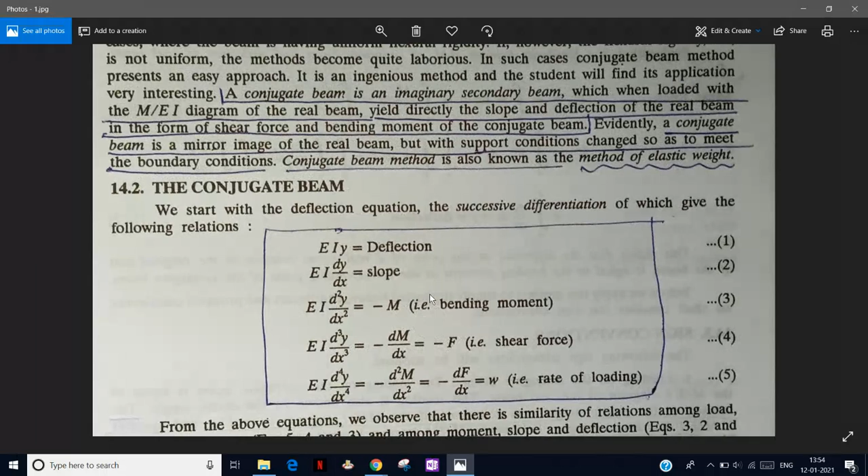So first, what is a conjugate beam? A conjugate beam is an imaginary beam with a similar kind of loading condition.

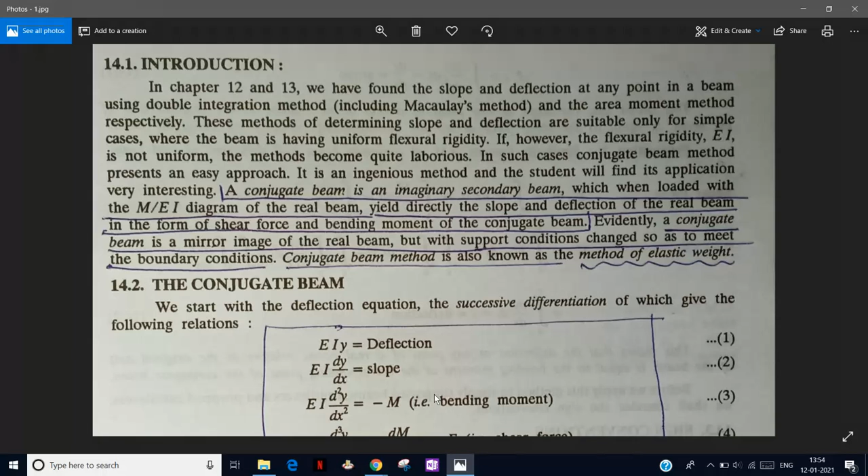There are many deflection finding methods. You can find the deflection by the area moment method, Castigliano's theorem, strain energy method, double integration method, and so on. But whatever method you use, the result should not change.

For example, a simply supported beam with a point load at the center: deflection is WL cube. If the point load is W, then it is WL cube upon 48EI. So whichever method you use, the result should not change.

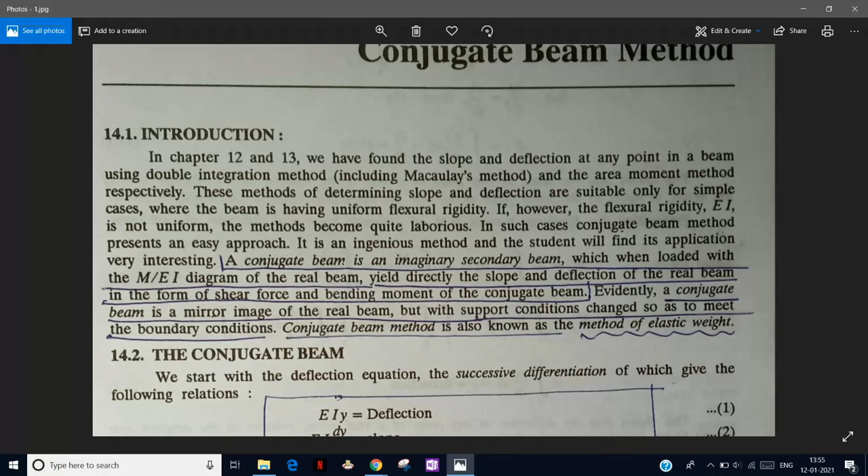So this is the method, which is the conjugate beam method. What is a conjugate beam? It is an imaginary beam, or you can say a secondary beam.

What we do is, for our actual beam, we draw the bending moment diagram, and then we divide it by EI, the flexural rigidity. Then that M by EI diagram, whatever graph you get—whether triangular, rectangular, or parabolic—that curve will become your load.

For example, a uniformly varying load has a triangular shape, so it will remain the same. If your M by EI diagram is a rectangle, then your loading for the conjugate beam is that rectangular uniformly distributed load. If it's triangular, then it is a uniformly varying load.

So what we have to do in this method is: first we draw the shear force and bending moment diagram for the real beam, the beam given in the question. Then, after the bending moment diagram, we divide it by EI.

We divide by EI, and whatever diagram we get, we put another beam over there, and that beam will be our conjugate beam. You can say it is a mirror image of the real beam, and it is also known as the method of elastic weight.

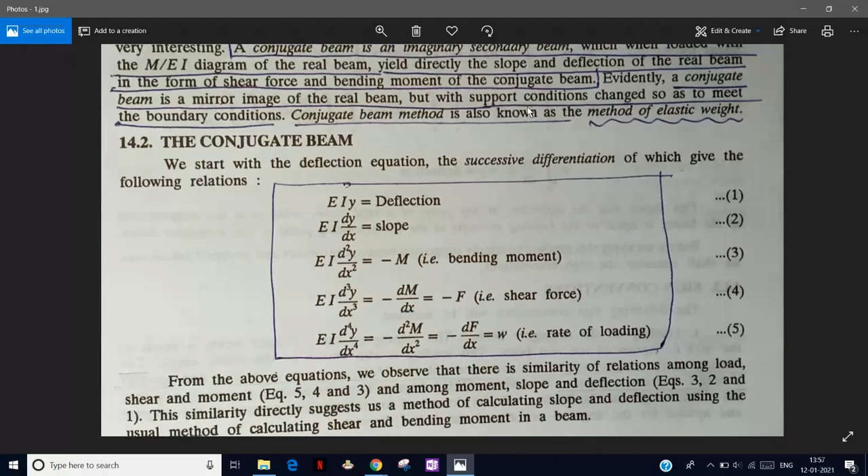So where did this equation come from? Before going to any derivation, we know that EI into Y is called deflection. If you take the derivative dy by dx, it becomes the slope.

If you take the second derivative, it becomes the negative of bending moment, as we all know. Again, if you differentiate, it becomes the derivative of bending moment. In equation 4, you can see it becomes shear force, and if you differentiate a fourth time, the deflection y becomes del F by del x.

That means the rate of change of shear force at any particular point gives the rate of loading w. We all know these relations, so we will use this relation in our method.

Now one thing, write down somewhere: whatever shear force diagram you get for the conjugate beam will give you the slope, and the bending moment diagram of that conjugate beam will give the deflection for the real beam.

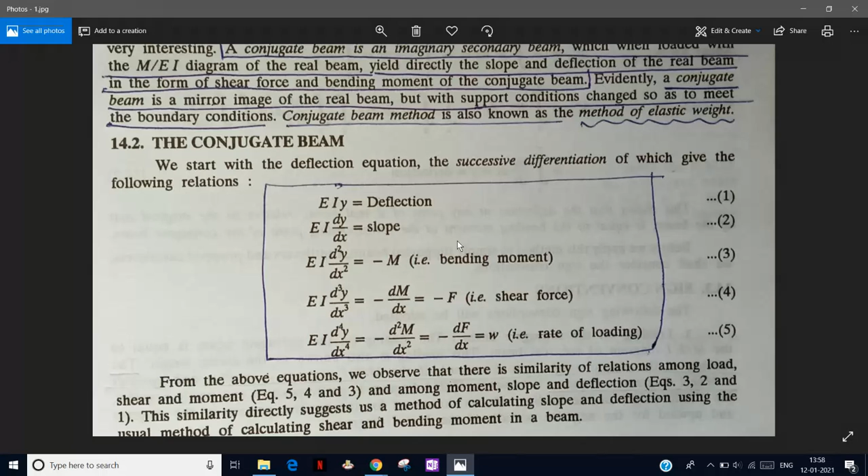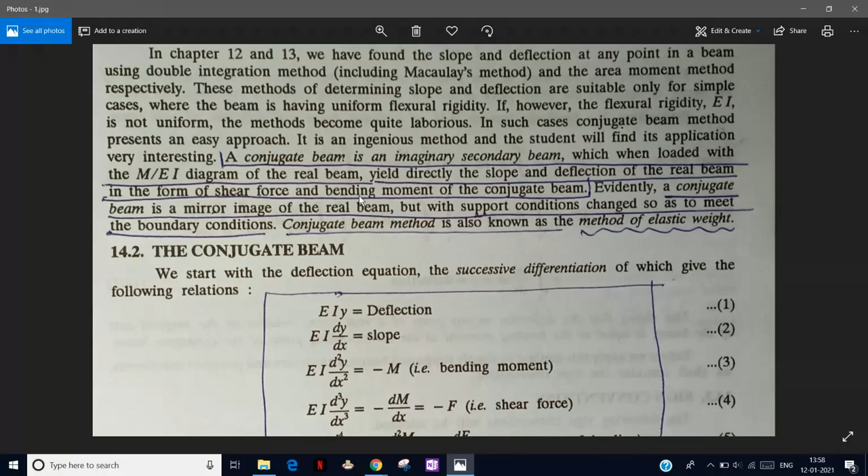This is all written here, and it's not something I wrote myself, but it's in the book, and I have underlined that point also here. So this is the basic concept about conjugate beam—what a conjugate beam is.

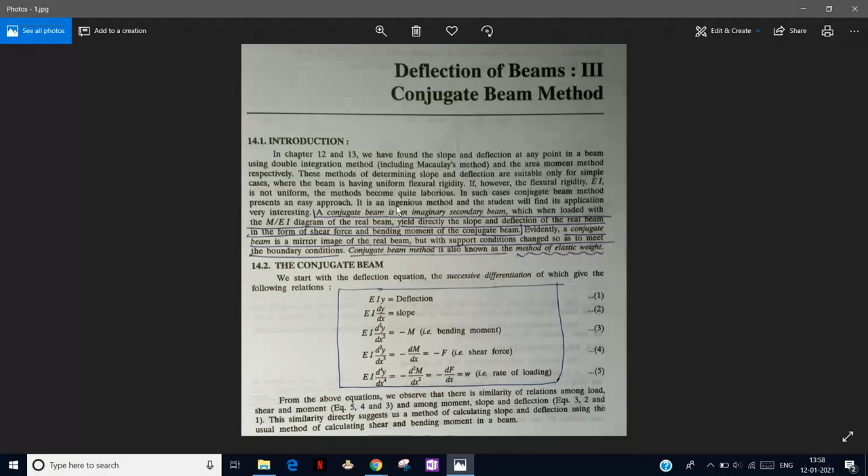The imaginary mirror beam where the load is M by EI, whatever our actual bending moment divided by EI, that will be our loading condition.

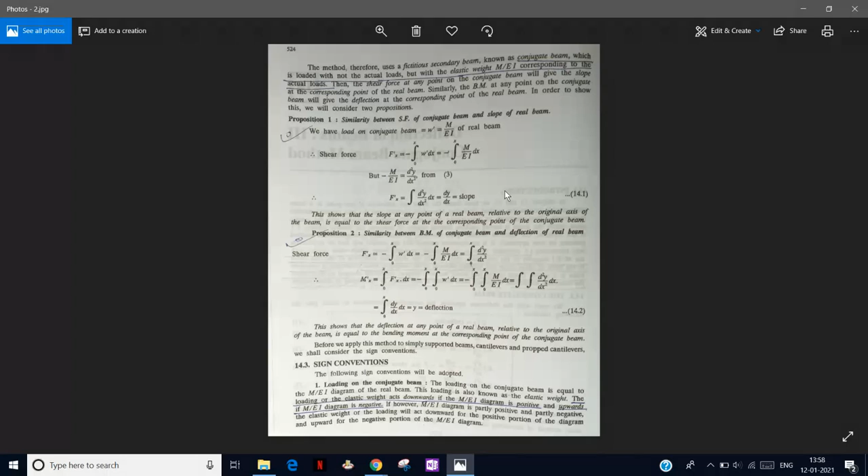So the last statement I will tell is that the shear force diagram for conjugate beam is slope, and the bending moment diagram for conjugate beam is deflection. This is a mathematical proof of it.

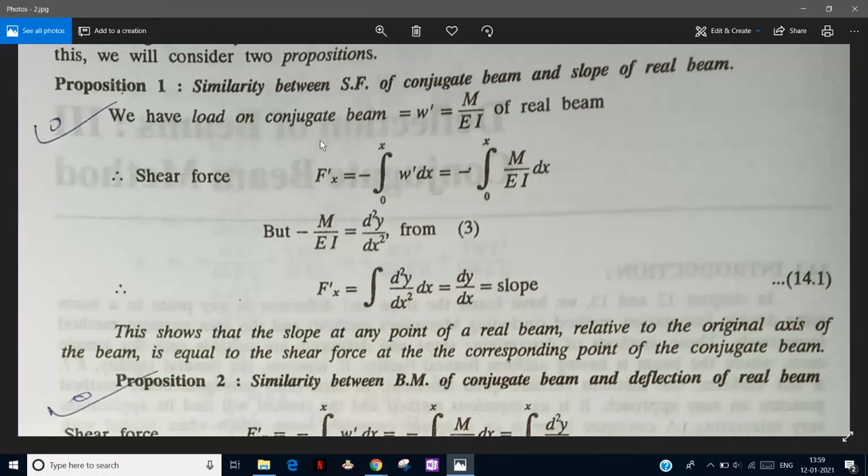Because if I go on to derive it, it will be a very long video, and this is a very easy derivation. So whatever I said, that is a mathematical proof.

Now second thing, the direct sign convention, direction, or you can say sign convention. So for loading, if M by EI diagram is below the line, like for example cantilever beam, your bending moment diagram is below your zero line, or beam line. So you have to take

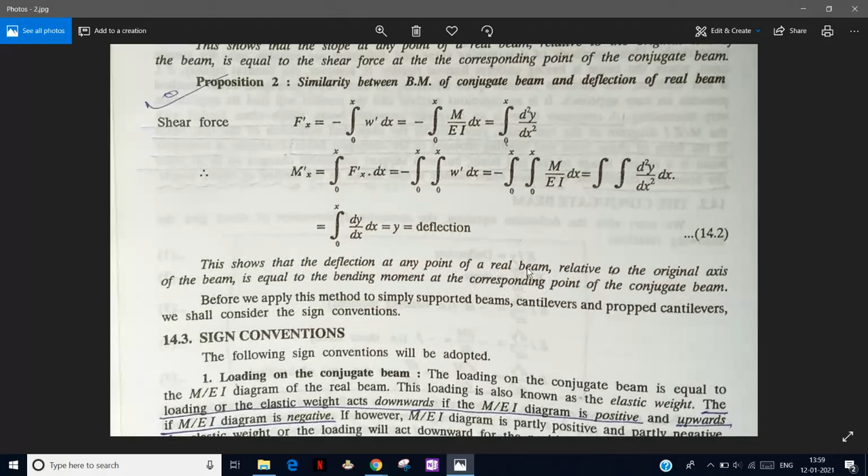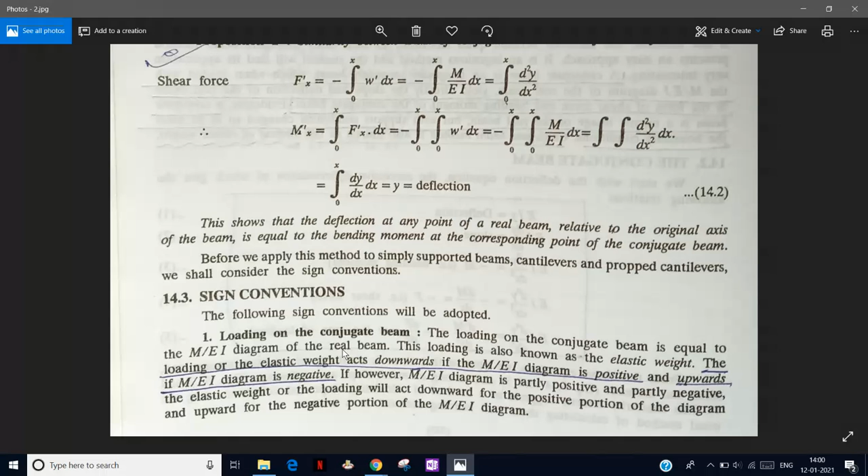And loading condition will be upward, that means down to up, upwards, when M by EI diagram is below the beam line. In case of cantilever beam, we know the triangular or parabolic shape is below the zero line, so in that case loading will be upward.

Next sign convention, that is slope and deflection, I already told you.

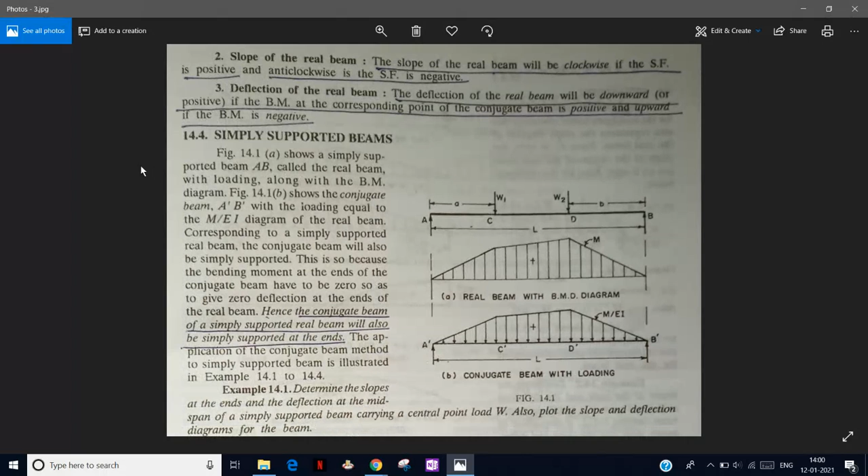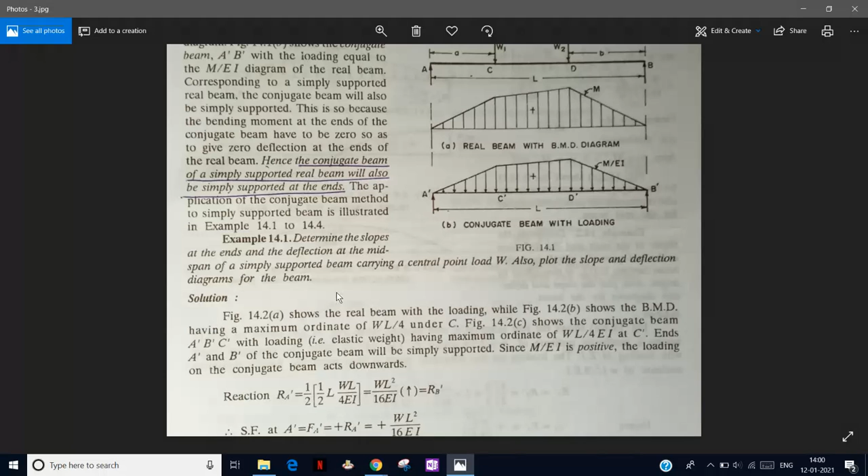Now let us take one example. This is the first example, 14.1 as per the book: determine the slopes at the ends and deflection at the midspan of the simply supported beam carrying a central point load W, and also plot the slope and deflection diagram of the beam. That means our simply supported beam with point load W.

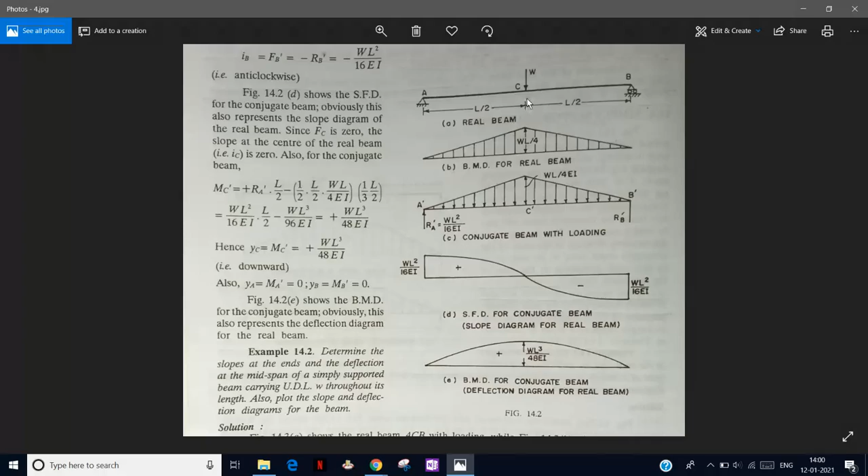So let me go on to the next page. This is the beam, simply supported beam with point load.

We know the maximum deflection occurs at the center, and maximum bending moment is also at the center, with magnitude WL by 4. Now divide by EI, so the M by EI diagram will be WL by 4EI, and the shape is similar.

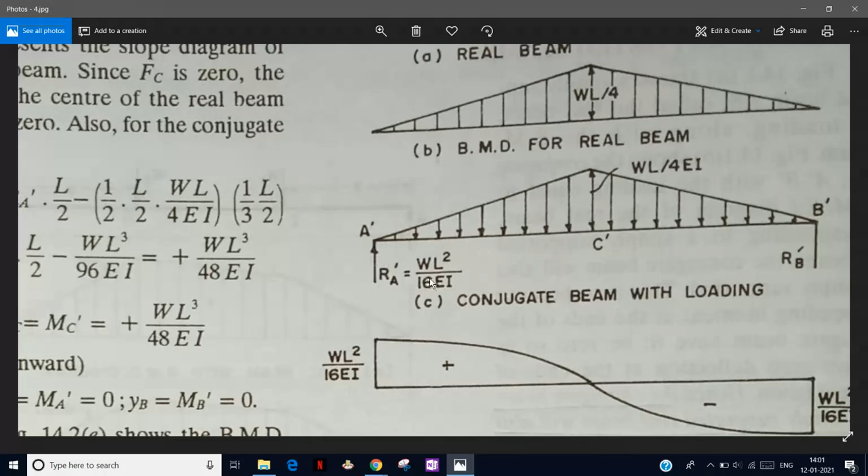Now this will become a loading condition. So here, as you can see, the conjugate beam with loading, figure C. These are the reaction forces and this is the downward force. So all the calculations are done here.

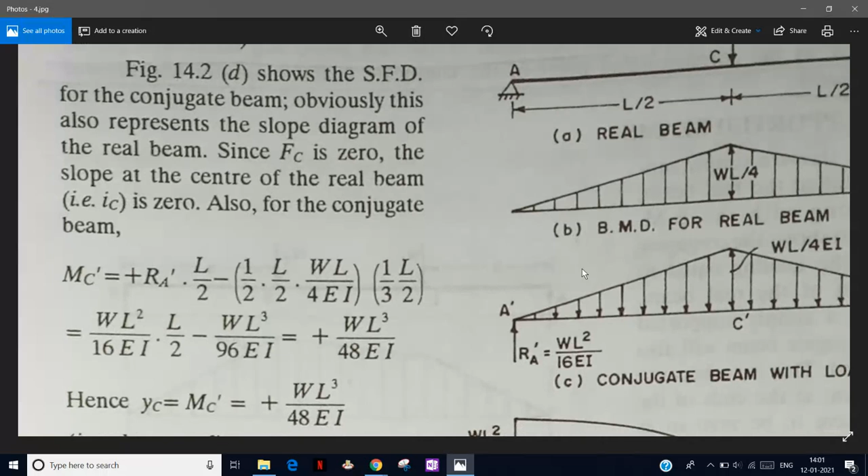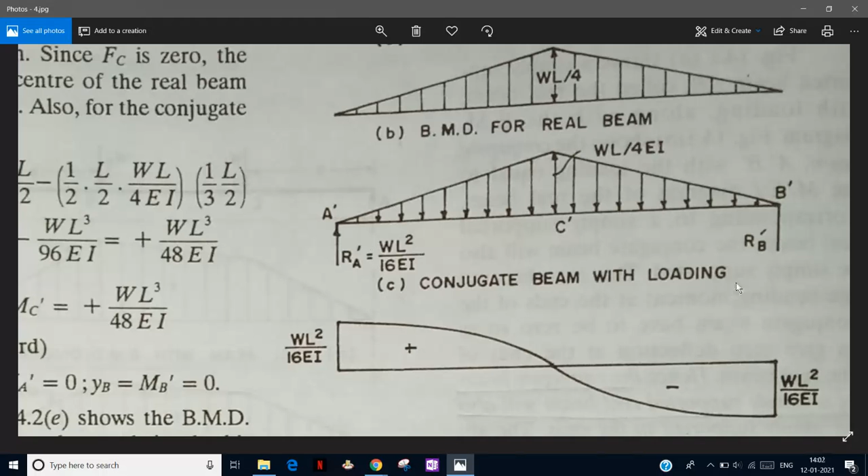WL square upon 16EI, WL square upon 16EI. You know very well the equilibrium condition: taking moment about one of the points equals zero. So you will find RA dash and RB dash, that means reaction, WL square upon 16EI.

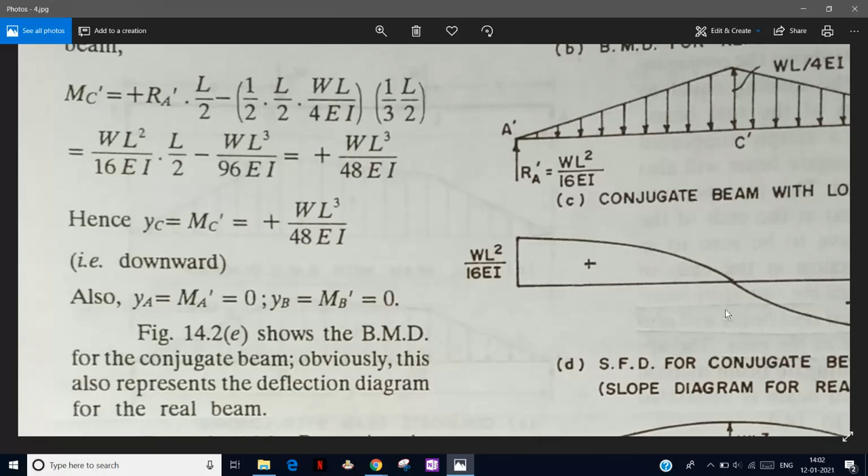Then bending moment diagram—sorry, first let us draw the shear force diagram. So here there is a point load, so there is a sudden rise and then a gradual decrease because the area is increasing. So here shear force is 0, 0, and it goes like this, positive and negative.

So here the maximum value is WL square upon 16EI, that is the maximum shear force value for the conjugate beam. That maximum shear force value means maximum slope, and the maximum slope in case of simply supported beam is at the ends, at points A and B.

And what does maximum shear force of conjugate beam show? It shows slope of the real beam. So this is the slope, WL square upon 16EI.

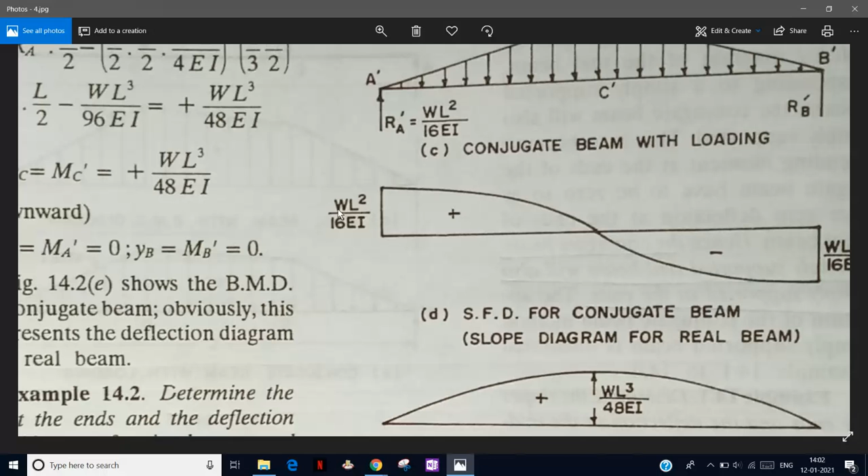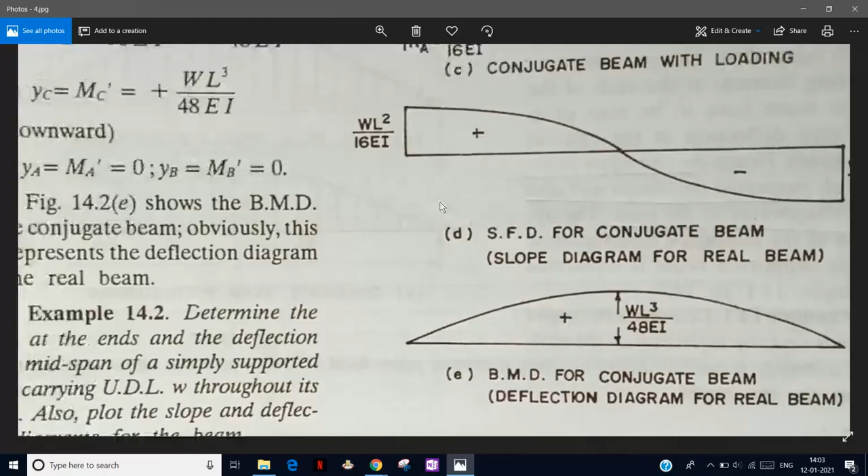Now if you draw this bending moment diagram, it is a cubic curve, WL cube upon 48EI, because first this is the calculation—they have taken the moment about point C.

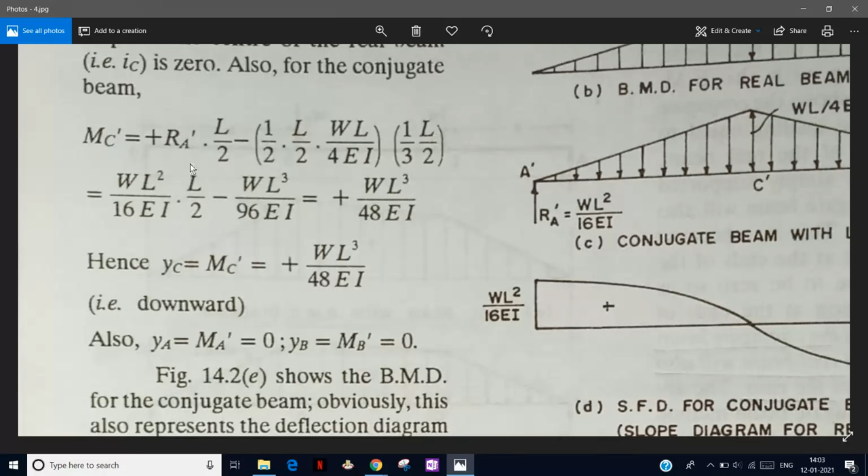So there is RA force into L by 2 distance, positive slope, and this is the triangular area, uniformly varying load. So its weight will act as a CG, that is from 2/3 from point A. After the calculation you will get WL cube upon 48EI, that is the maximum bending moment value.

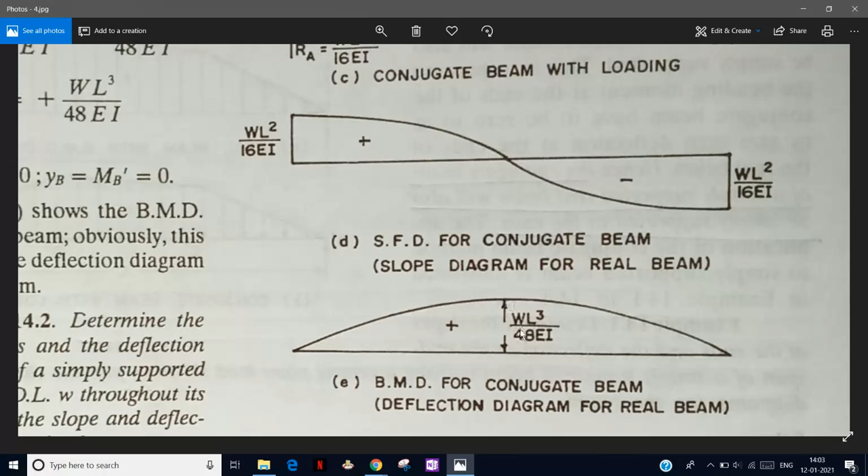The curve follows a cubic curve, and the maximum bending moment value will give the maximum deflection, and in a simply supported beam, maximum deflection occurs at the center. This deflection value will give you the deflection as WL cube upon 48 EI. So this is the method.

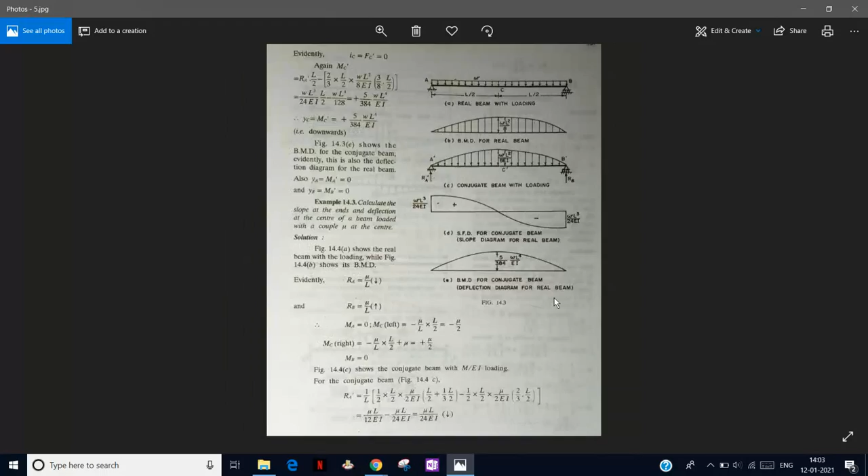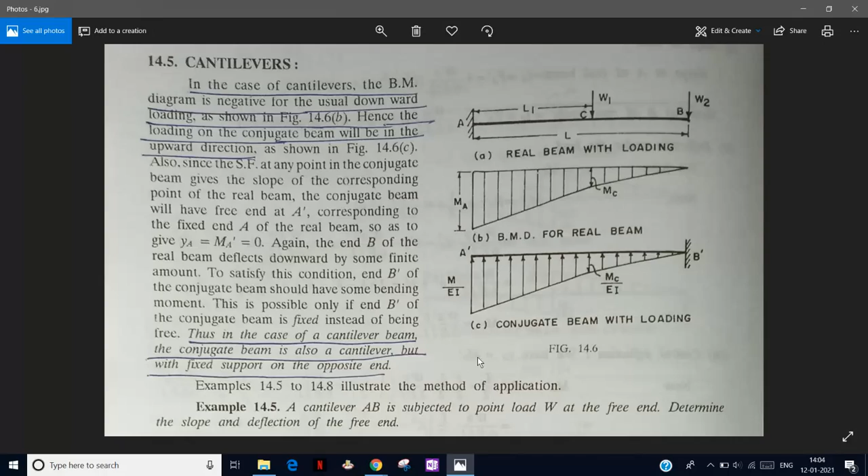Next we will take an example of cantilevers, but there is one change in cantilever. The change is that whatever fixed end will become free end and free end will become fixed end. As you can see here in figure C, the bending moment diagram is downward, so loading will be upward side, as shown in the figure. We will solve using the same method.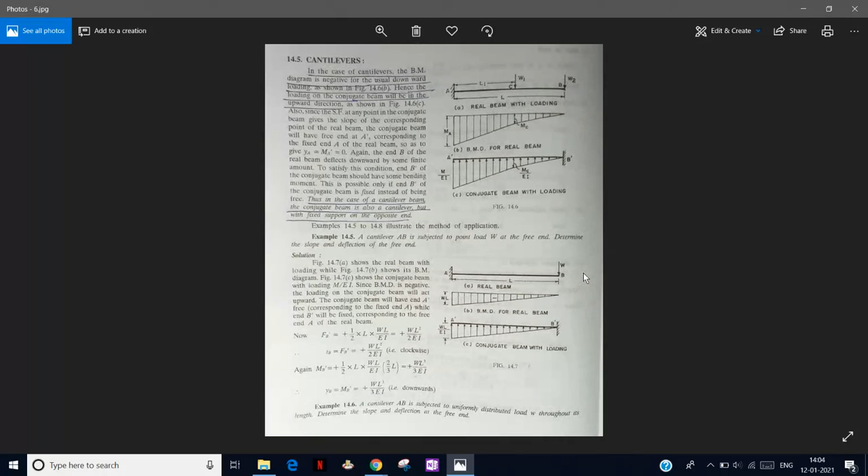So this is the thing. Now in a simply supported beam, we do not have to change anything, but in cantilever and internal roller support, we have to change some conditions. So what are those conditions, please keep in mind.

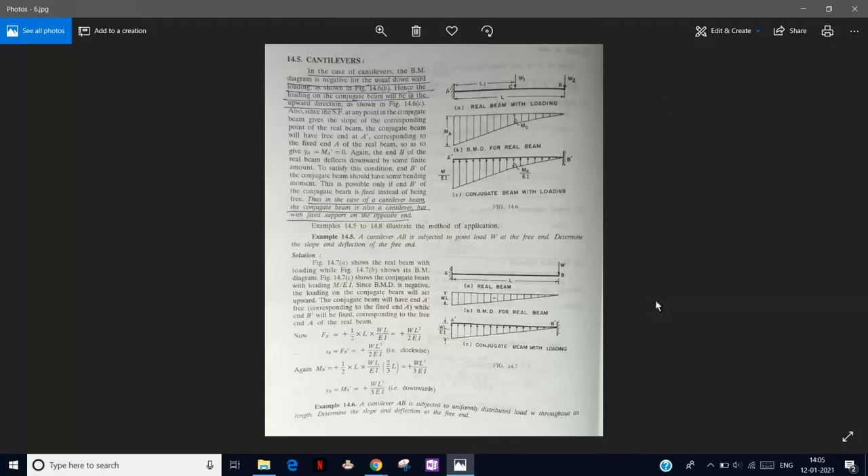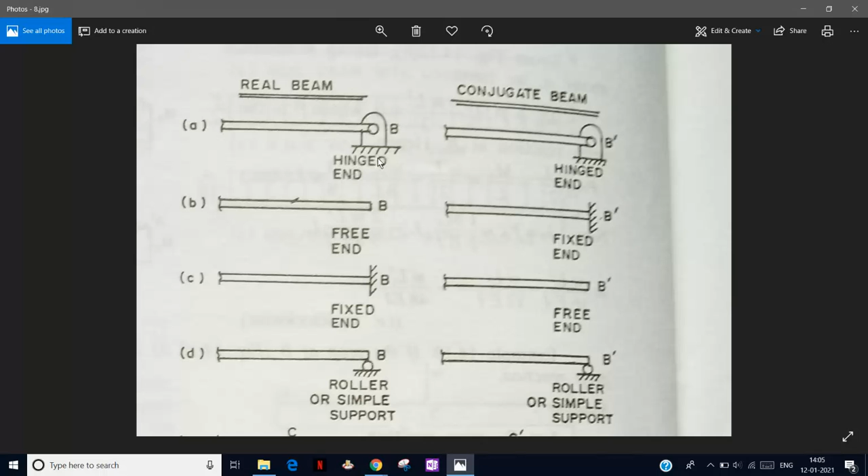This is some sign convention. If this is the real beam and conjugate beam, and there is a hinge end, that means simply supported case, so in the conjugate beam there is also a hinged end, no change. If there is a free end in the real beam, then it will become a fixed end, and fixed end becomes free end.

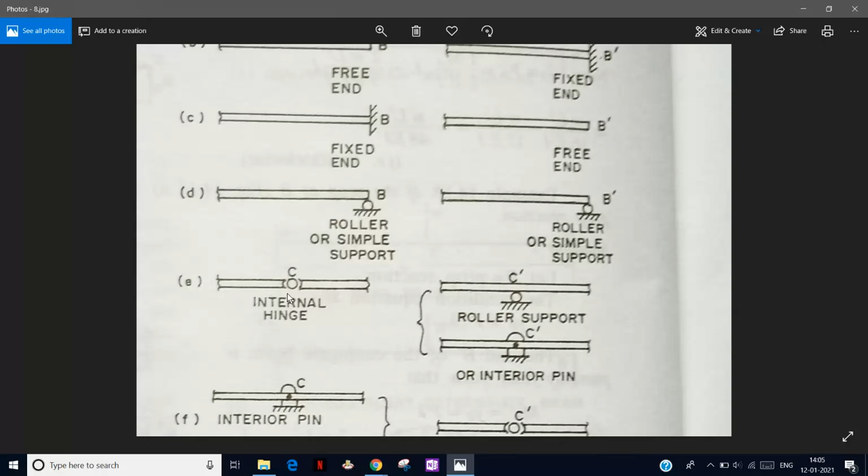If there is a roller support, then it will become roller support, but there is an internal hinge, like an internal welded joint. At some points, as you have solved in numericals, all the maximum deflection and maximum stress will occur at C. We solved this question previously, and it was also asked in the GATE exam. So the internal hinge will become a roller support or interior pin, meaning an internal pin joint.

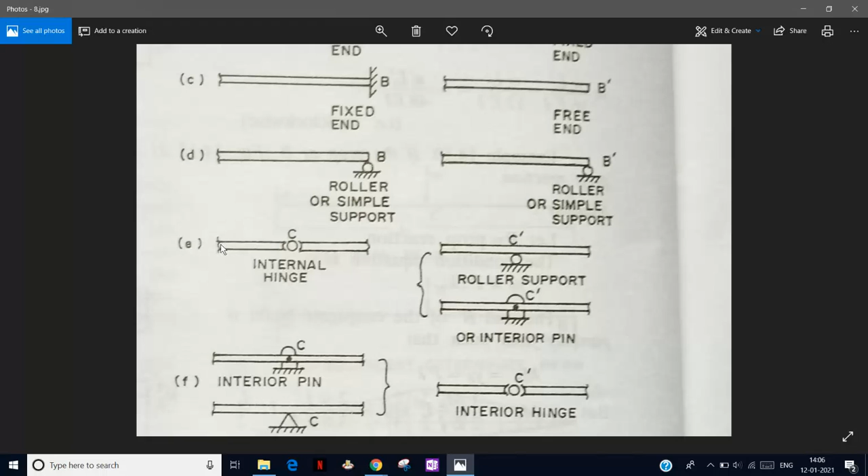But it will depend upon the condition. If both ends are fixed, suppose this is an internal hinge, and here on the left side there is a fixed joint, and here is a fixed end, both beams with both sides fixed, then your internal part will become an interior pin, this internal hinge will become interior pin. And if on both ends there is a simple support, then it will become roller support, and vice versa the same.

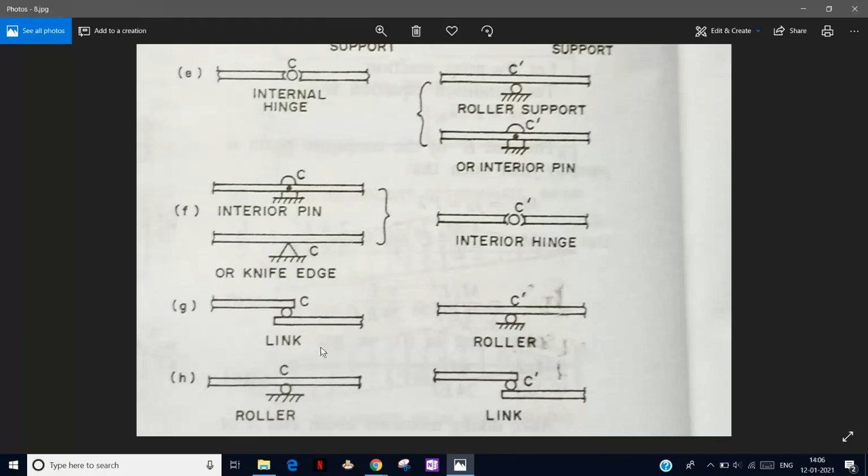And here the same, if there is a link connected by two rollers, one roller connected with a link, then it will become simply one roller, a constant length beam, and vice versa. So these are some sign conventions that you have to remember.